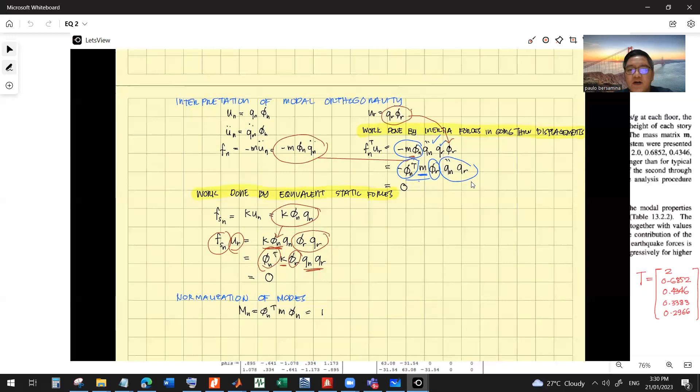I have a recorded video about this for modal orthogonality, that in order for this to be zero, phi n transpose m phi r should be zero, because omega r square minus omega n square is non-zero.

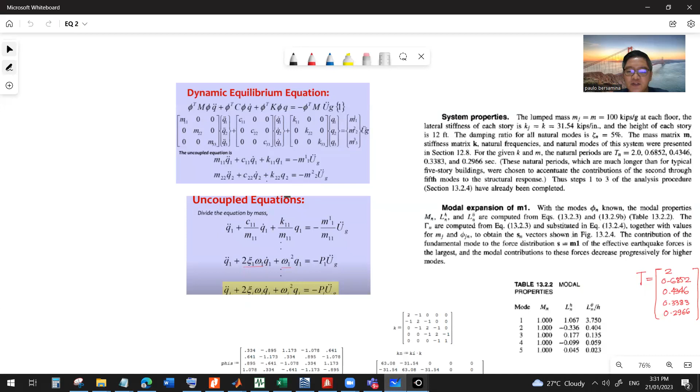For example, if we have modes, say for this 5-story, we have mode 1, mode 2, mode 3, and they are not equal to each other. So omega r square minus omega n square has a value, and since it has value, this is non-zero.

So for this equation to be valid, phi n transpose m phi r should be zero. And this is 1 if you have phi n transpose m phi n.

We call this the generalized mass, generalized mass matrix according to Chopra. This is also 1 if the modes are normalized. You will see that in Chopra.

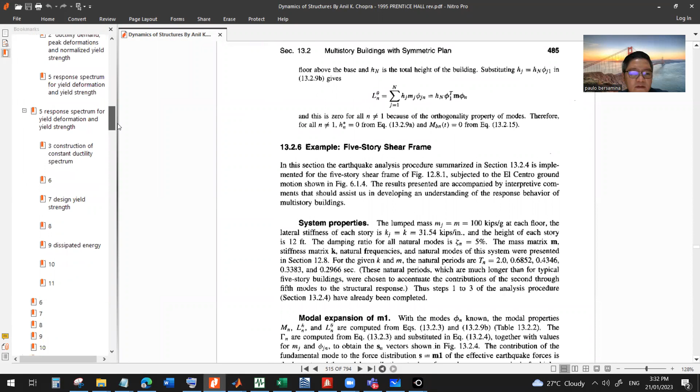Let's see where modal orthogonality is discussed. Chapter 10. There's a derivation there.

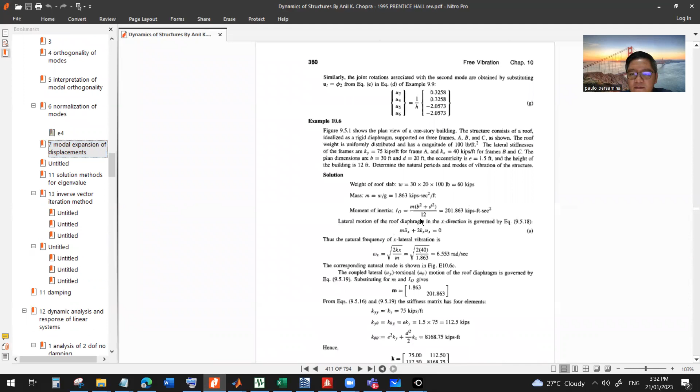So you will see this is M. Phi n transpose M phi n is the generalized mass matrix. For K it's the same, phi n transpose K phi n is the big K.

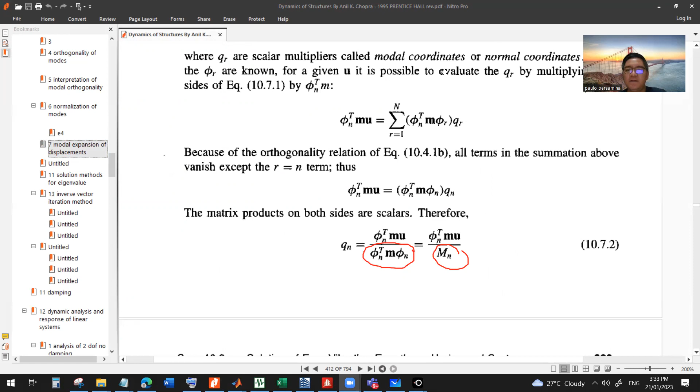Now let's proceed here. With that, this becomes a diagonal mass matrix, phi transpose M phi. But first, if we rewrite our equation of motion, that will be mu double dot...

So we have mu double dot plus cu dot plus ku equals the force as a function of time. And from this equation, the actual displacement is equal to a certain q multiplied by the eigenvectors. So we call that u equals phi q.

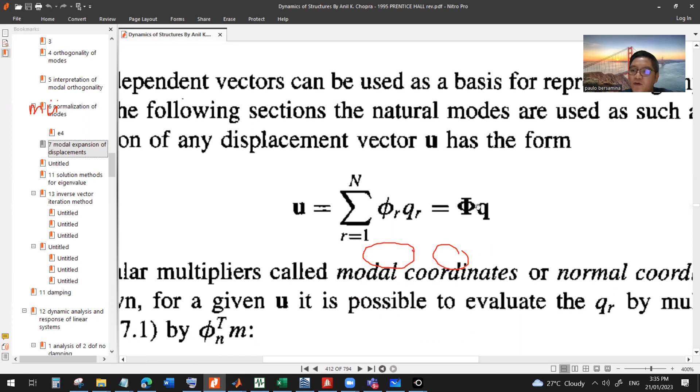So it turns out q is the multiplier to your mode shape. Remember, when we got the mode shape, for example this 5-story, we were able to find its mode shape. But that's not yet the actual displacement.

So in order to get the actual displacement, we need this q factor. So to get the actual displacement u, we substitute it in. So we have m: u double dot will be phi q double dot, plus c u dot will be phi q dot, plus k u as phi q.

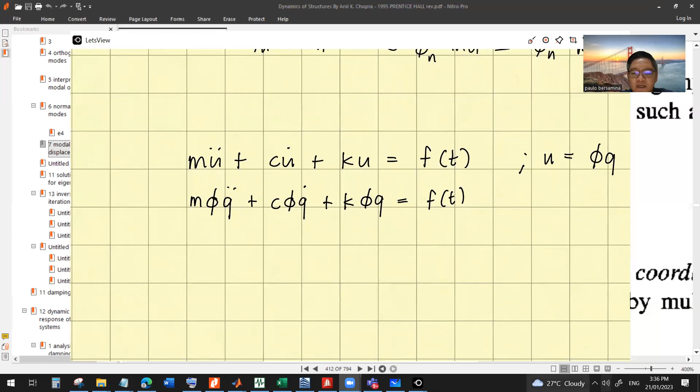And then it says let's multiply both sides with phi transpose. So when you do that, we're going to have phi transpose m phi q double dot plus phi transpose c phi q dot plus phi transpose k phi q.

Now, since we know this is m, this is the damping matrix, this is k, we can call this the force. Therefore, we now have this: m q double dot plus c q dot plus k q, using the big K now, equals the force as a function of time.

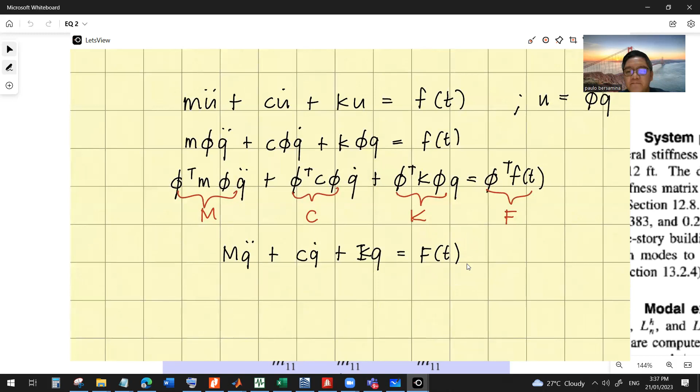Then what did they do next? This equation already shows us that we were able to uncouple the equation of motion.

If we interpret this, we have this: M becomes a diagonal matrix, so C11, C22, C33, same with K. So for example, what's shown here is 2 degrees of freedom, or 2-story.

You will see you have equation 1, equation 2, independent of each other: M11 Q1 double dot plus C11 Q1 dot plus K11 Q1 equals negative N11 U double dot. Of course, this is just another representation, phi transpose F, since this is ground motion, the force here.

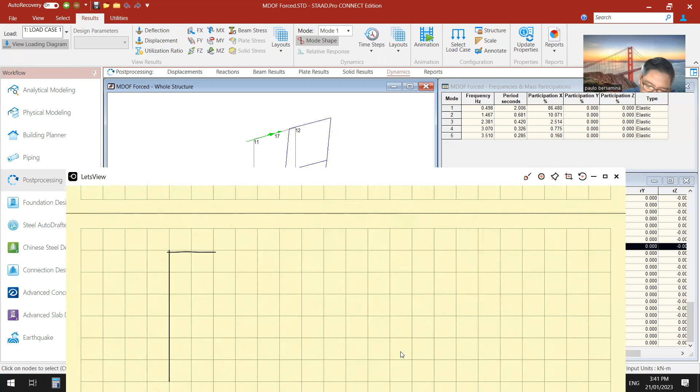Let me write this again. So let's say this is it. 1, 2, 3, 4, 5.

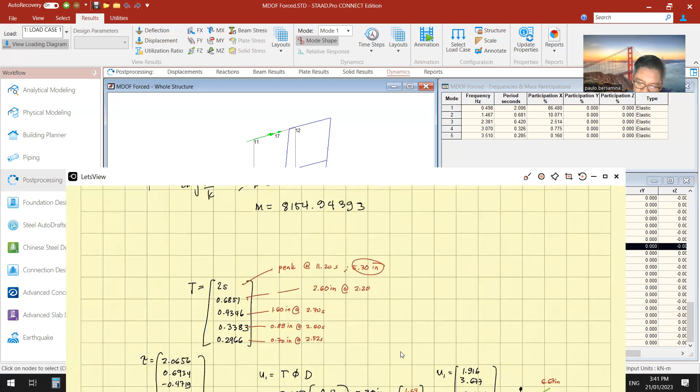Okay, let me write down the periods. We have these periods, I think we already solved this before. Let me just copy this. This one, copy... and paste. So these are the periods, and we already have the SMath for that.

Okay, now let's apply a force wherever you want. Okay, let's go here again. Let's say 30 sine omega bar t. So let's place a harmonic force at that location.

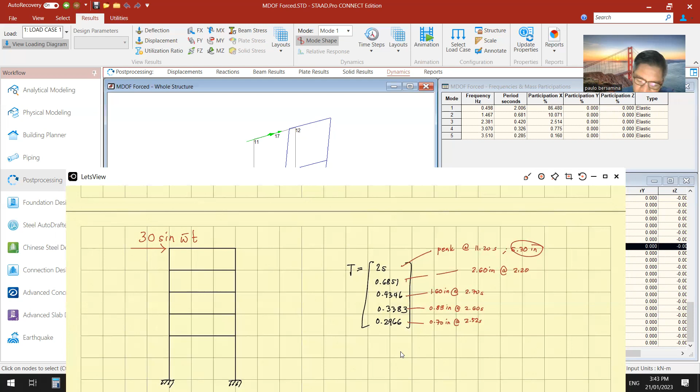So we're going to find the response of mode 1, mode 2, mode 3, mode 4, and mode 5.

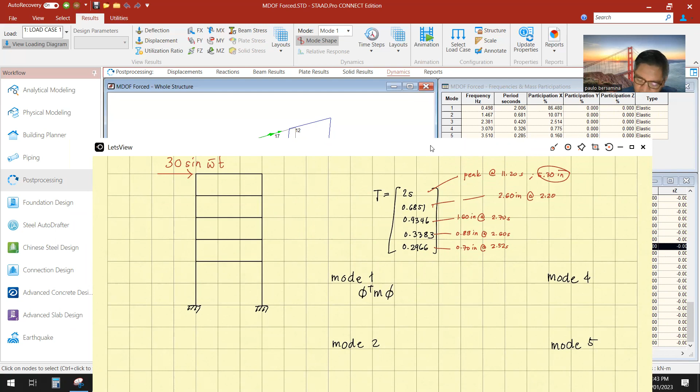So we'll take one by one: phi transpose M phi for mode 1. Same for K: phi transpose K phi for mode 1. And also the phi transpose F.

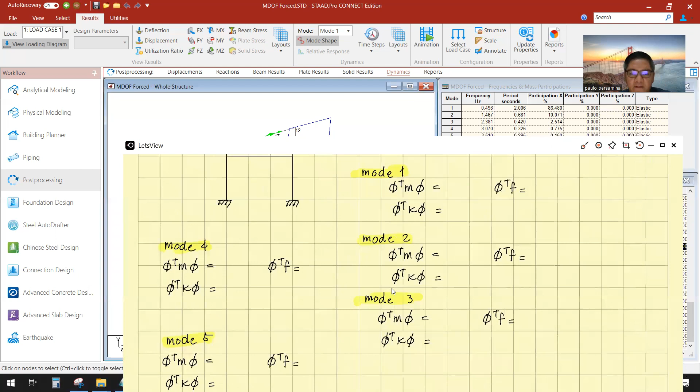Okay, that's mode 4, mode 5, and I'll highlight that. So we'll use our SMath that we used last time. Where is it? I think this one.

Although this one is in inches, since this is patterned after Chopra. Okay, let's continue. I have an SI version of this. This one. Yeah, this is in SI already.

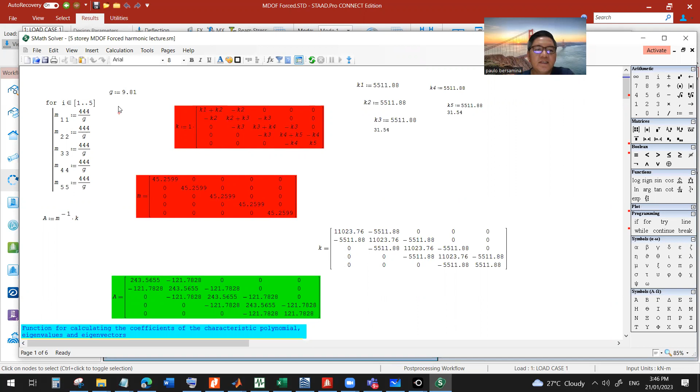So the 100 kips becomes 444 kilonewton, and this time our G is 9.81. Remember, this is our check, the periods, to make sure we're using the same data.

You have 2 seconds, okay, 0.68, 0.43, 0.33, and 0.2966. Okay.

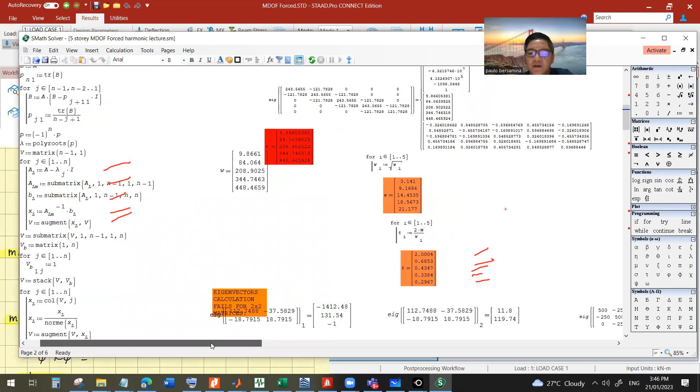So since the periods are consistent, we'll follow this eigenvector or mode shape. So I've placed it here. Wait, not that one. Yeah, this one.

So remember, this is our equation to solve the generalized mass for each mode: for mode 1, phi transpose M phi. And this is my corresponding SMath value for that. Let's zoom in.

So remember, in SMath, this is mode 1. This is phi transpose, this is the mass matrix, and this is the phi. And it turns out this is our mass for mode 1, and we do the same for each mode.

So this is for mode 2, mode 3, mode 4, mode 5, and so on. You'll observe the mass is the same, since the mass per floor is the same. So let's write that down.

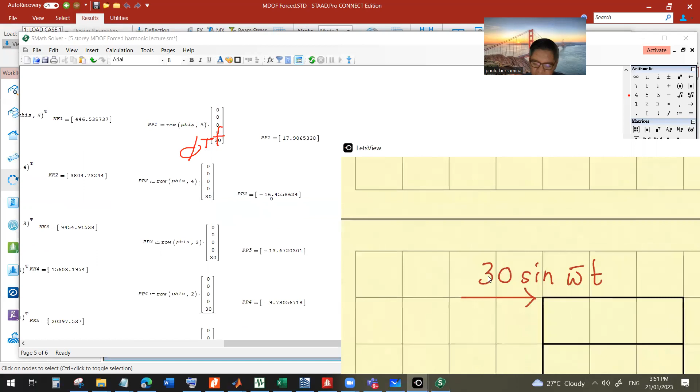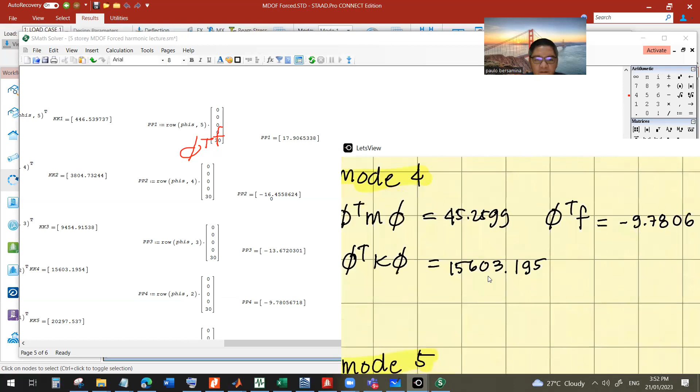So that's 17.90653. Mode 2, negative 16.456. Mode 3, negative 13.672. Mode 4, negative 9.7806. Mode 5, negative 5.09674.

So this is it. Quickly, let's try to absorb what's happening. Basically this generalized mass and stiffness idealizes each mode into an SDOF - the MDOF becomes an SDOF.

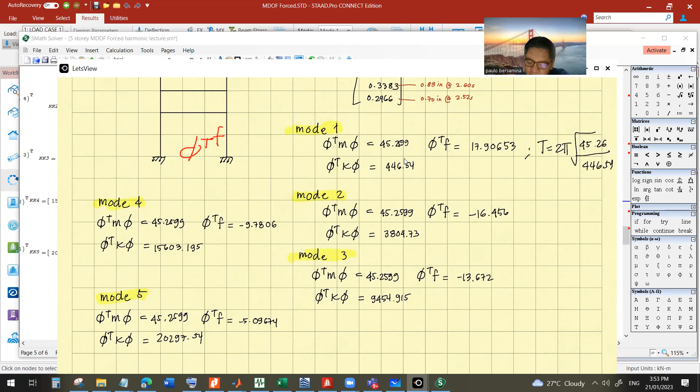So for example, let's substitute the period: 2 pi square root of m, 45.26, divided by k, 446.54. Look at that, for mode 1.

Okay, then when you substitute that, what do you get? You will basically get a period of 2 seconds, which corresponds to what we got in our eigenvalue analysis. Parang kinonvert niya yung mode 1 into a mass and stiffness to come up with this period. So yun yung ginagawa niya.

So once we have that, kukunin na ngayon natin yung mga response, yung time history response ng bawat mode. For example, so let's...

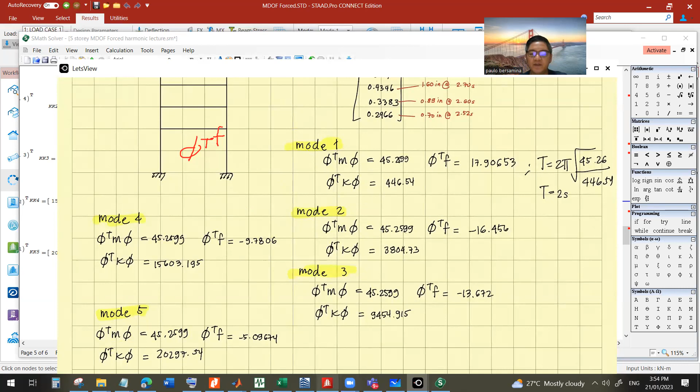Okay, punta ngayon tayo dito sa STAAD natin. Let's subject that to the force, 30 kilonewton, sine omega bar T. So what omega bar do we want?

For example, let me review first. Ano ba yung omega bar nito? Or sorry, yung omega, no? Frequency ng bawat mode. Yan, ito yung frequency ng bawat modes. I'll try to write that here to give us an idea. So omega is equal to, meaning the natural frequency.

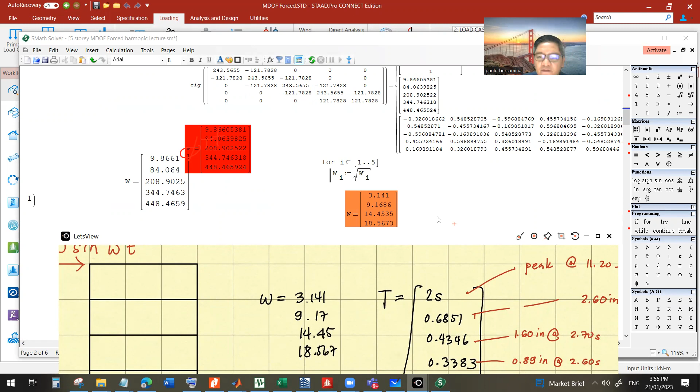So this is 3.141, 9.17, 14.45 — apat lang to — 18.567, and finally 21.177.

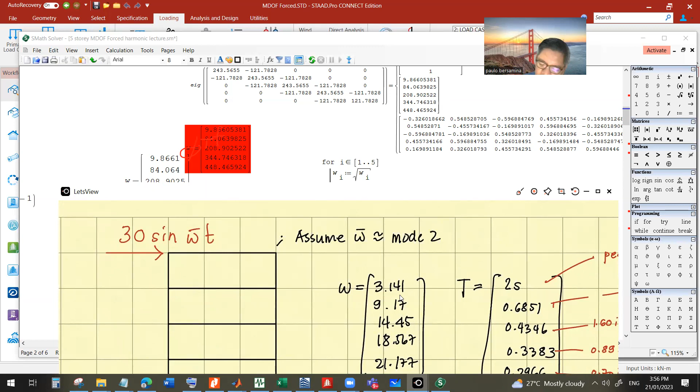So let's choose an omega bar of, let's choose an omega bar near, for example, near mode 2. What do you want? 9.17, okay. Assume omega bar 9 near mode 2, say 10, yan, 10 na lang. Say omega bar 10, okay. So anong cycles yan?

So 30 sine, what's that? If I convert that, 10 equals 2 pi, so that will be 10 divided by 2 pi, kasi one cycle is 2 pi. 1.5915. Yeah, 1.5915, okay?

One point — 30 kilonewton, say assume tayo ng 5 cycles lang para maiksi lang. Then modify, yes close, and undump tayo. Where do we — ito siya. Then lagay natin dito sa taas. Applied here. Okay, so save.

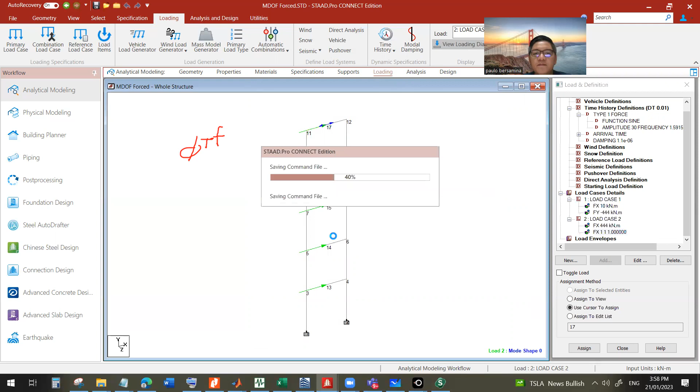Then analyze, run analysis. Post-processing, dynamics. So the same period. Dito tayo sa displacement.

Yan, so this is the displacement at the roof. So we have a maximum displacement of 28.4. So I'll...

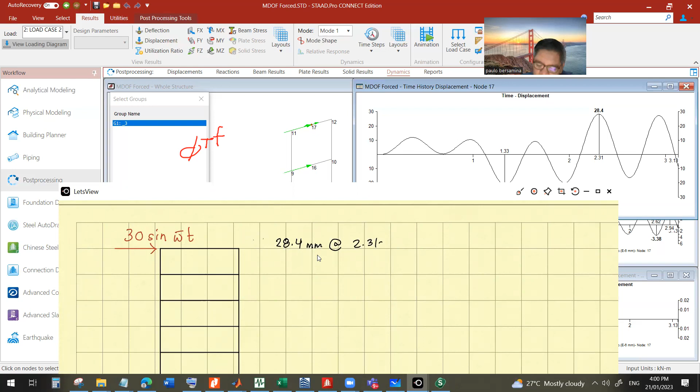So let's record that. 28.4 at 2.31 seconds. Now how about sa fourth floor? 15.3 at 2.33 seconds. And here, 18.6 at 2.6 seconds. 28.1 at 2.6 seconds din, and 20.1 millimeter at 2.62 seconds.

Okay, how about — okay, say — alam, this one.

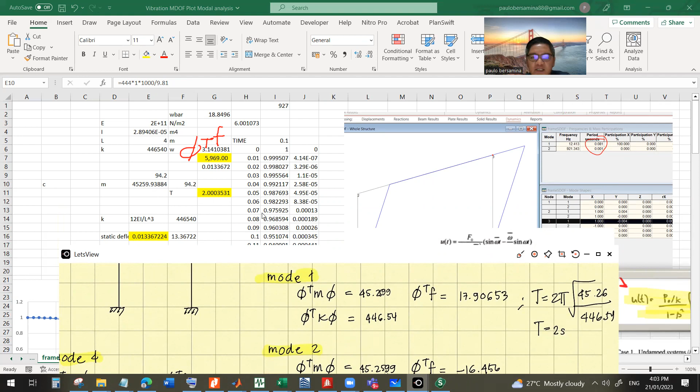Okay, now remember ito yung nasulat nating mga mass. Generalized mass for mode 1, 45.2599. So nilagay ko na siya dito, 45, dahil naka-Newton yung spreadsheet, 45,259, 0.93. Then the K is 446.54 — bali 540 kasi nga Newton per meter. How about the force? It should be 17,906.53. Palitan ko to — 17,906.53.

Then ito na yung time history response. Ah, by the way, ano yung omega ko pala? Ano yung nilagay kong omega? Is 1.5915, 1.59. Yan yung nilagay nating omega or cycle sa STAAD. And this is now the time history response of a 2-second SDOF. Okay, nagawa natin ito nakaraan, pero ngayon naka-specific sa 2 seconds, kasi nga yun yung mode 1 natin.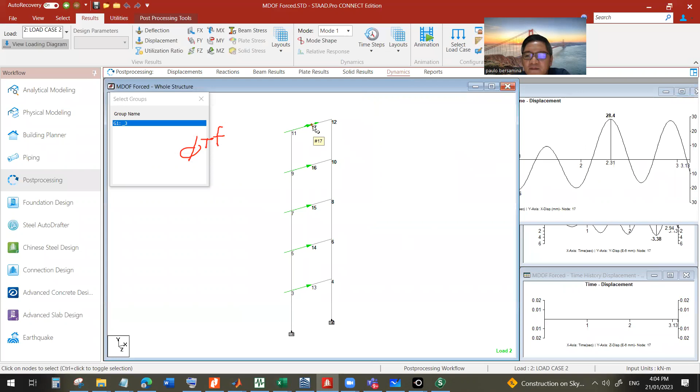Okay, so i-verify muna natin itong response ng roof, 28.4 at 2.31 seconds. Nasaan si 2.31? Laki pala, ang haba pala, wait lang. Teka, ano bang magandang — 2.31. Sige, yan, 28.4, 2.31.

Sige, dagdagan ko to ha. 2.31... 1.7 pa lang. Ayun, so here ang response ni 2 seconds sa 2.31 second ay 1, 2, 3... 15.47, 15.48 na lang, millimeters. So kay mode 1, sulat ko dito, 15.48 millimeters at 2.31. Okay, sinulat ko.

So under 2 seconds yan. Next, punta naman tayo sa mode 2, which is 0.68. Okay, 0.68, ito, 0.68. So double check natin yung mass. Yeah, the same, 45.259, ito, yan. 45.259, K, 3,804,730, yan, the same, ito yun.

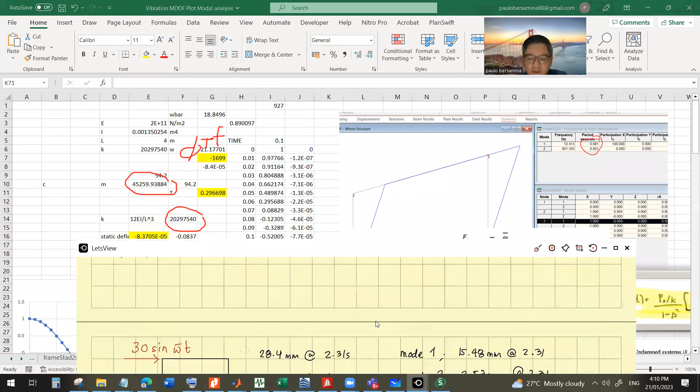At 2.31, and finally mode 5. Okay, let's check. Yeah, so mass is the same, 45,259, K, 20,297,540, and the force negative 5,096.74. Okay, yeah, 2.31. Okay.

Yeah, I'm getting negative 0.53. So wala nang effect yung halos, negative 0.53, 2.31. That's it, no? Now when we add up all that, what do we get? So ito yung summary at 2.31.

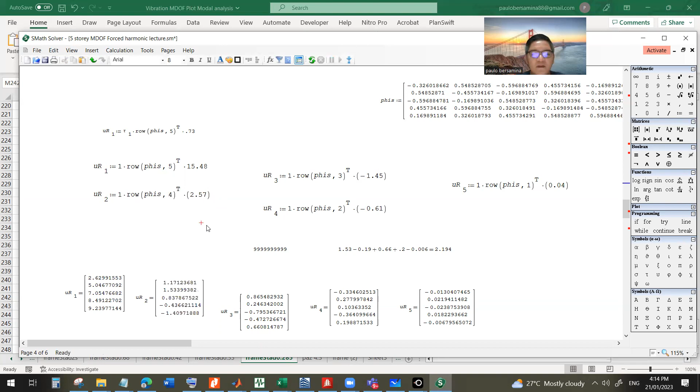Okay, ito. So I'll try now to input that here. So input ko si 15.48. And then 2.57, like this one. Negative 3.36. 9.72.

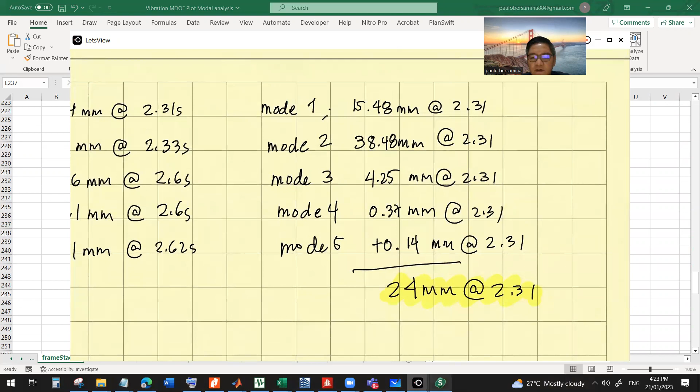So, 15.48. So, strip natin dito. And this one is 38.48. And then, ito, 4.25. 0.37. Okay. 0.14.

Maybe ito may discrepancy lang to na ano, 15 and 38. Paras mo silang positive. Okay, they're both positive.

Ayan. Updated ba yun? Ano, yung aking vector. Copy ko to. Copy this, then paste here.

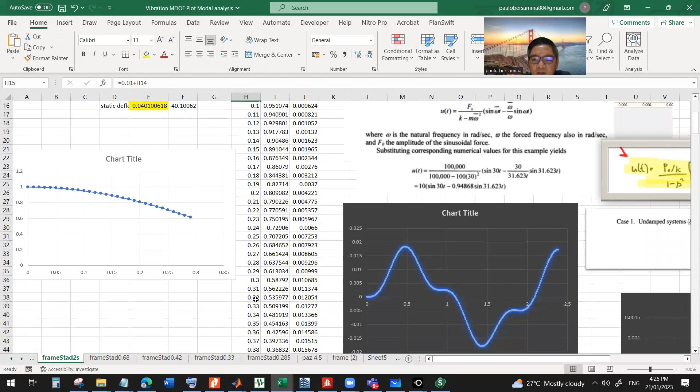Maybe because this is more on sa, what do you call this, masyadong close yung aking spacing. Point lang no? 0.01, no? 0.01. Oh ba? Yeah, 0.01. Let me check.

Okay, double check natin. Negative si mode 2, negative si mode 3, negative si mode 4, negative mode 5. Okay, correct.

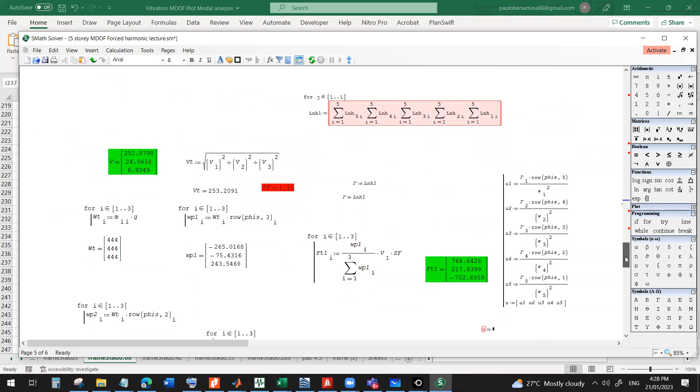So the sign, no? And return to mode 2. Ayan, it should be negative, no? Negative 38.48. Okay. So I'll make this negative 38.48. Yeah, okay.

So pansin nyo na, when I change the value into negative 38.48, naging positive na siya. Naging additive na sila ni mode 1 and mode 2. Okay, nakita ko the values are already close to each other, no? Kasi sa signs, there's a discrepancy on the signs. Okay, so basically this is now the displacement at 2.31.

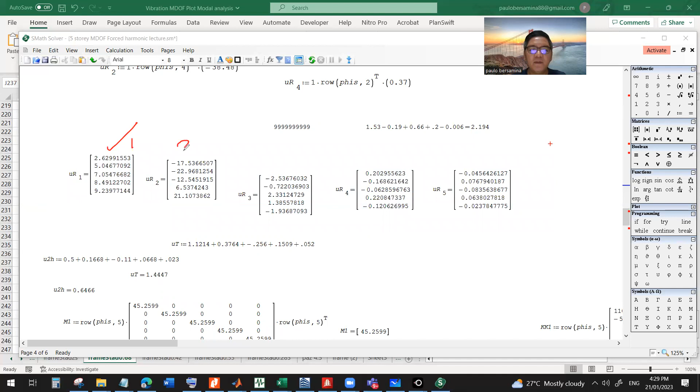That's it. Yeah, this vector, no? Displacement vector na yan from each mode. Contribution by mode 1, by mode 2, by mode 3, by mode 4, by mode 5, at 2.31 seconds. Kasi yun yung kinapture natin, that's what we captured earlier. Okay, so for example, these are the values at the roof.

Huh? Yeah, so when you add up 9.24 plus 21.11 minus 1.94 minus 0.12 minus 0.023, so now I'm getting 28.27, which is pretty close kay STAAD, no? STAAD gets 28.4. Ito siya, at 2.31 seconds. Okay?

Okay, so let's recall what we did. Basically, again, we got the maximum, hindi maximum response, the time history response of each SDOF, treated each mode shape, or modal period, as an SDOF, at a certain time, 2.31 in this case. Then nilagay natin sila dito, these are the responses of that modal period at 2.31. So basically, this is the implementation of U equals phi Q. We were able to get Q, the responses from each mode. Then this phi transpose, yan na yung mode shape, multiplied to the response of each mode. Then with that, you will be able to get the displacement from each mode naman. Okay?

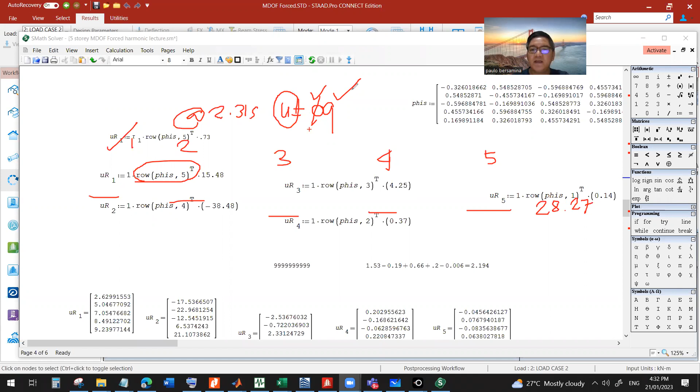So that's how we implemented the modal analysis. Again, it doesn't mean that's the maximum response. We just captured the time history response at 2.31 seconds.

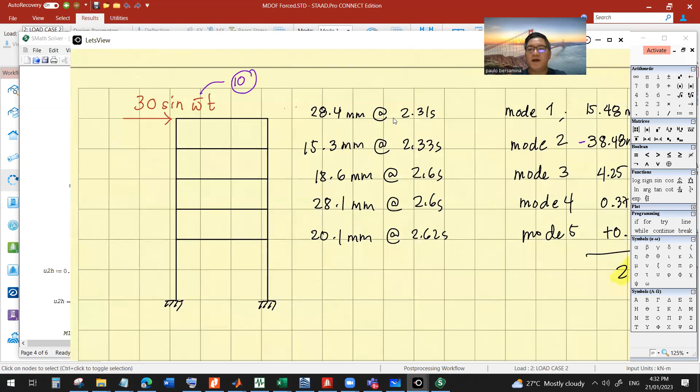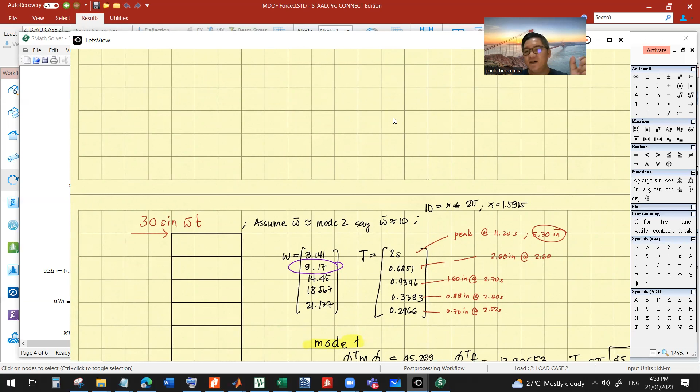And this is the summary, which I wrote down earlier: 28.4 at 2.31 seconds. Remember, our omega here is 10, omega bar. Let's compare - we really intended that to be as close as possible to mode 2, which is 9.17. Meaning we applied a harmonic force to the MDOF, the 5-story structure, exciting mode 2, which means the response of mode 2 will be amplified, or it will be the one excited.

And let's see if that happens. If you look at the summary here, see which one has the maximum response at that time period. Mode 2 - we were able to see that the maximum response is at mode 2, at 38.48 millimeters at 2.31 seconds.

So it means if we change the omega bar such that it's close to mode 1, that mode will have the maximum response, because it's the one excited at that time period, because of this omega bar.

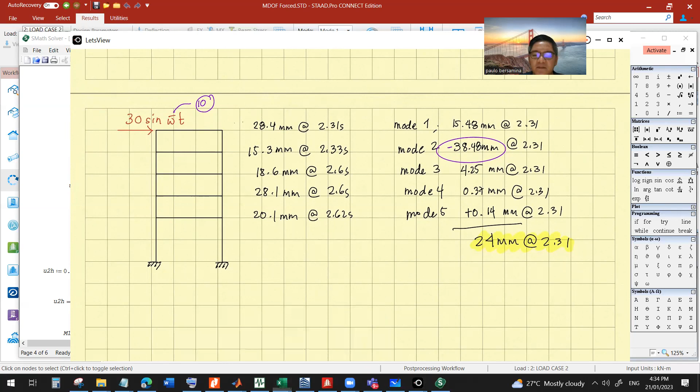Now in getting the maximum response, this is similar to what we did for time history under ground motion - this is time history under harmonic excitation. Now to get the maximum response, similar to response spectra analysis, same procedure - you just have to get the maximum response in each mode. Just find the maximum response.

Let's check. If we check the time history - but for me, the shortcut will be to change the cycle. Let's try to change the cycle. Instead of just 5, let's make it 30. Then during the time history, let's check if we achieve the maximum response.

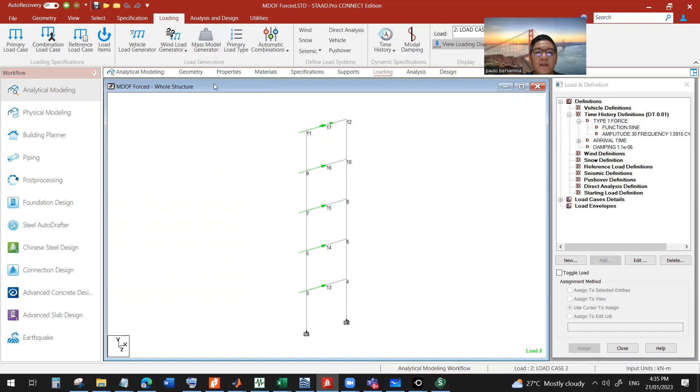Analysis. Run analysis. Post-processing. Okay, then results, displacement. And so...

For the roof, we got a maximum response of 35.9 at 11.5 seconds. So it takes a while - it needs more than 10 seconds to get the maximum response. Anyway let's try, 11.5 for maximum response, 35.9. I'll write that down: max response 35.9 millimeters

at 11.5 seconds. How about the second floor? Take note, this harmonic force is in resonance or almost in resonance with mode 2. And we got 17.6 at 12.4 seconds.

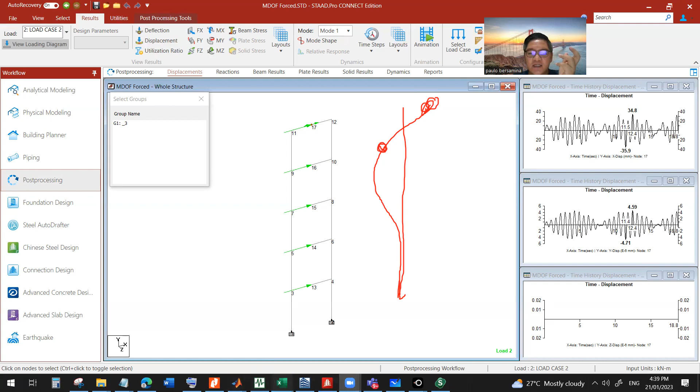seconds. So what we do now is check the time history response of each mode. Let's find the maximum response. So around 11 seconds - because this is the summary, if I show you, this is the summary of the maximum responses. Assuming we've covered the maximum response, you will observe the maximum response is in the vicinity of 10 to 15 seconds,

if you consider this 31.9 which happens very early at 3.6. So let's stick around 10 to 15 seconds. Let's check - meaning we'll extend the time history here, for mode 1. Let's check if that response is indeed achieved. So this will be a bit long.

Yeah, so it's there. 13.42, this should be enough now. I'll change the cover here.

So that will be J24... up to, what's the address? 1348. So I'll change this, I'll change it to 1348. This one also is 1348.

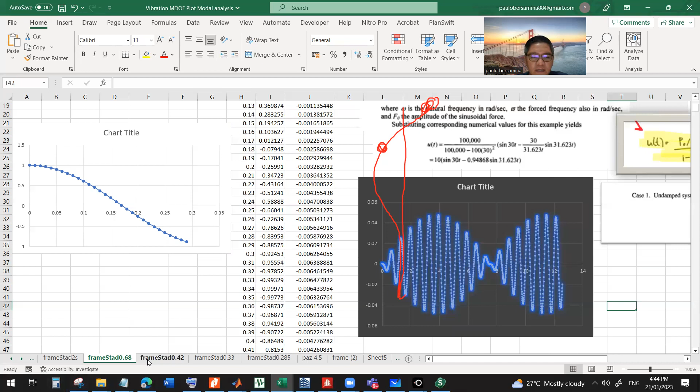Okay, 18.3. Now about mode 3. Let's cover up to 10 seconds also. Let's check if the address is 1231. Mode 3, this is now 1231.

And you will observe a cyclic pattern still. By inspection, the maximum response is maybe here - this is it. 1, 2, 3, 4 - 4.64. It's just around there, the max/min is around 4 anyway. 4.64 at 0.77 seconds. So that is mode 3.

And mode 4, about mode 4... 1158, okay I'll change this to 1158. Yeah, another cyclic pattern. And obviously, just a bit more than 1 mm - 1.4, yeah, 1.4. At time 3.3 seconds.

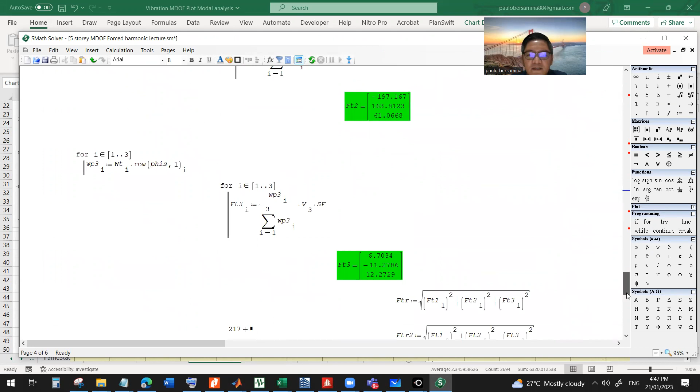47.14 millimeters. Okay, maybe let's guess mode 5 later. So if we talk about the maximum response, maybe - where do we insert this? What's that, maximum response? I'll just copy this. Control C. Nothing else to change really.

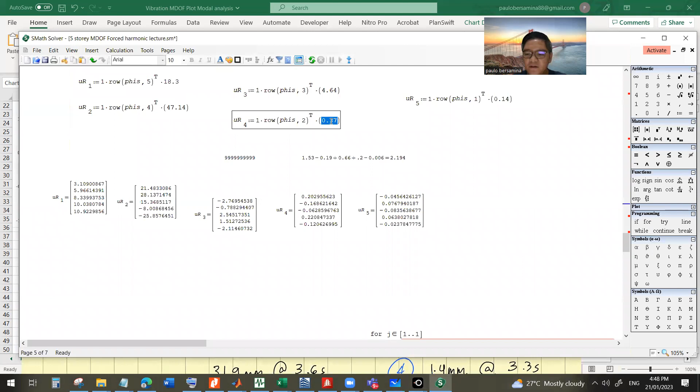Then move this, paste here. For maximum response, analogous to the response spectra analysis we did. I'll put 18.3 for mode 1, then 47.14, then 4.64, and last 1.4. I'll leave mode 5 for later - put 0.14 for now, that's fine. Okay, that's it.

So this time, what I input to the Q is the maximum response. Then these are not realistic displacements, because they come from the maximum response. We'll just do the SRSS. Square root of - where do we square root here? SRSS response. SRSS underscore response is equal to the square root of 10.92 squared, plus 25.86 squared, plus 2.11 squared, plus 0.456 squared, and then plus 0.024 squared. So this is the SRSS response.

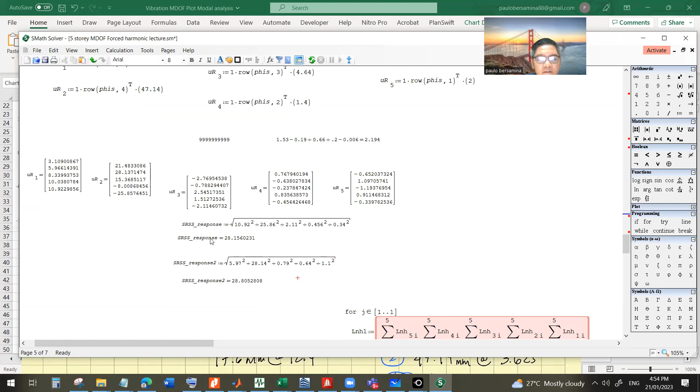Maybe this should be... no, that's correct. Okay.

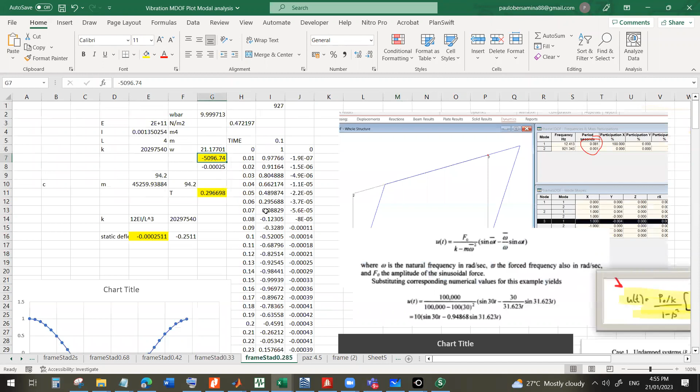Let me continue with mode 5 briefly to complete this. Okay, 1312. Like this, 1312. This is actually large too - 0.4, just 0.4. Point 4. This is 1 point something.

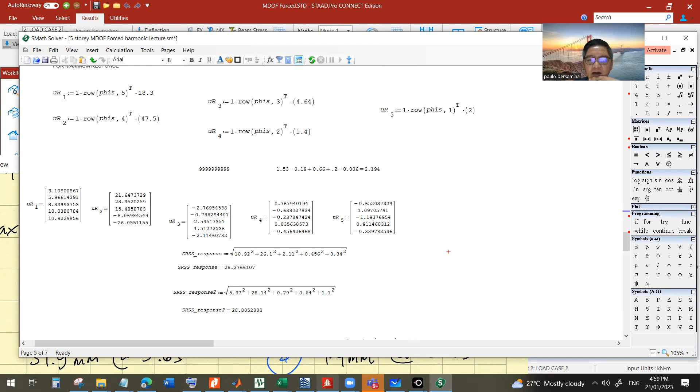Then for second floor, max response, or fourth floor, suddenly goes down, 17.6 only. So you will observe by the summary that it's still roof that has the maximum displacement, because that's also how mode 2 behaves.

But although roof has the maximum displacement, you will observe the contribution of mode 2 is really large. Still large, the contribution of mode 2, because if we use this for the fourth floor...

Let's copy this again for the fourth floor. Let's get its response: 10.04, 10.04, 8.1, 1.5, 0.5, 0.84.

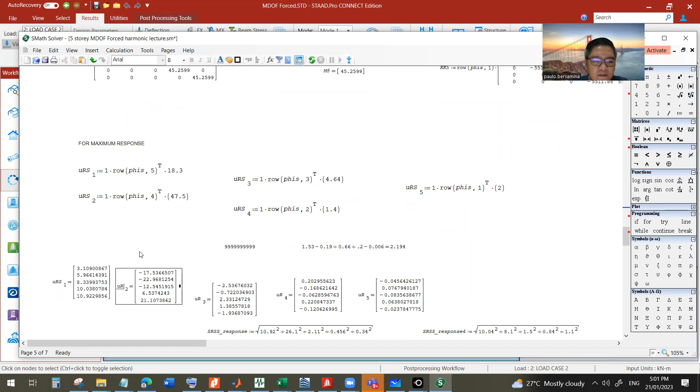Anyway, nothing changed, 26.1, 2.11, at least consistent. For the fourth floor: 10.04, 8.1, 1.5, 0.84, 0.

Wait, this is only 0.4. 0.18, 0.18. Let me copy this, paste here, equals. I'm getting just 13 mm.

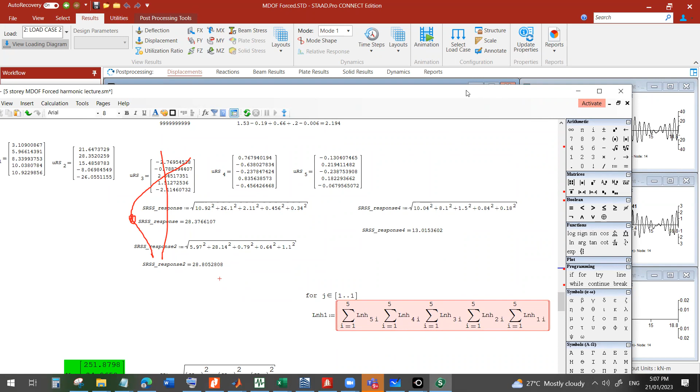Okay, and take note, the time when the maximum response occurred, between 3.6 seconds and 4.58, which is the same time the maximum response occurred for mode 2, 3.62 seconds.

And that's mode 2. So you can see the contribution of mode 2 is really dominant, because again, the applied force is almost in resonance with the natural frequency of mode 2 of our structure.

So that's your modal analysis. We were able to independently analyze each mode and then combine their responses to get the total response of our structure.

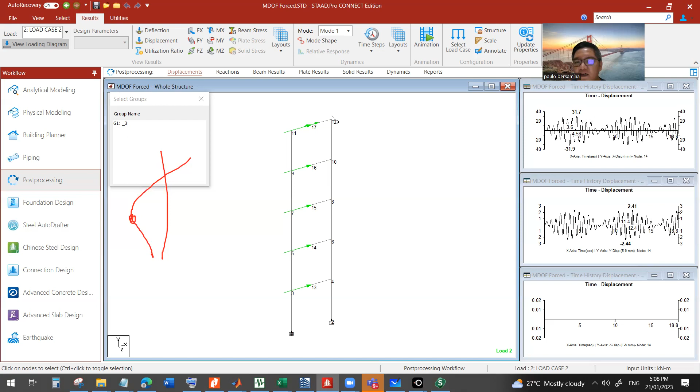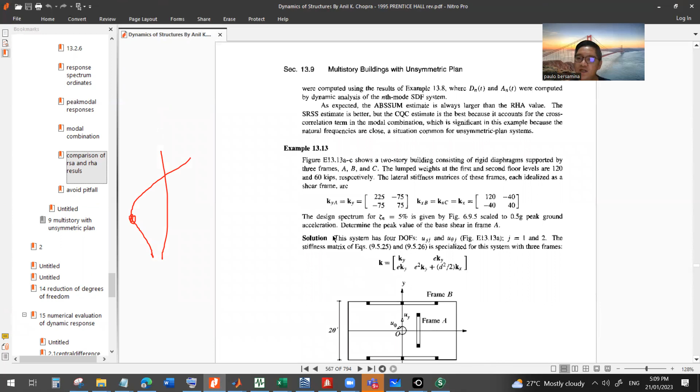Okay, you can supplement with CQC on your own, because there's a tendency for CQC to get close to our response here. As per Chopra, I think it's mentioned that there's a tendency to match - CQC will be more useful when the modes are close to each other. When the modes are close, there's a tendency that CQC is more preferred than SRSS.

Anyway, that's the technique to combine the responses. But I've shown you the time history response also - that's the more accurate one, of course, because that's the actual time history response.

But the benefit of SRSS and CQC is you don't need to compute the time history. If you have the time history of each SDOF, it's much easier to compute the maximum response, but it's a statistical combination that's being done - it's either SRSS or CQC.

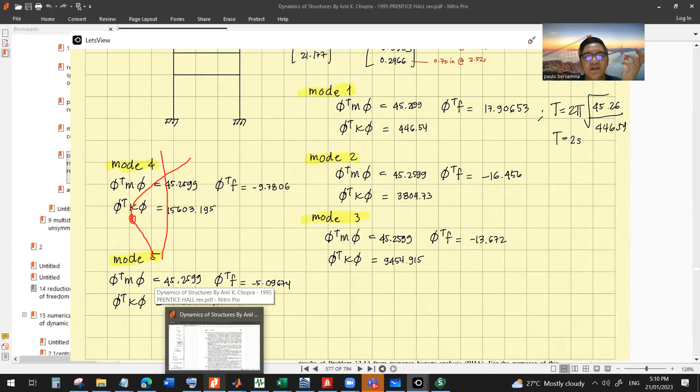Where is Mario Paz? Ito na lang.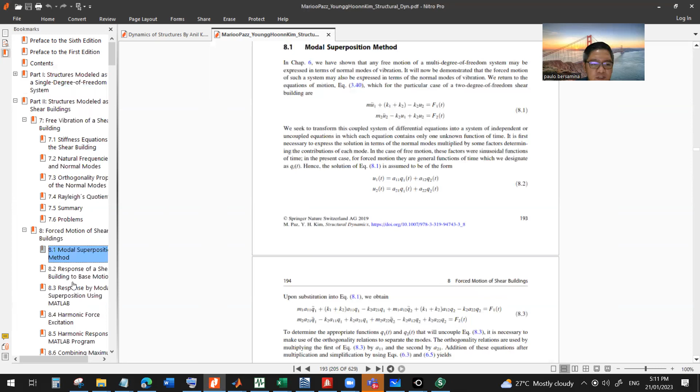Kasi the modal participation factor is used, no, dun sa under earthquake response. Where's that? So force motion, base motion, ito. So dito siya lumabas. Participation factor. But you will see yung derivation niya is still kagaya ng ginawa natin. So meaning this participation factor is this one. Actually this is basically phi transpose M divided by phi transpose M phi. Yan lang yon. And in our notation earlier, this one is the generalized mass. Okay, so ito din yon.

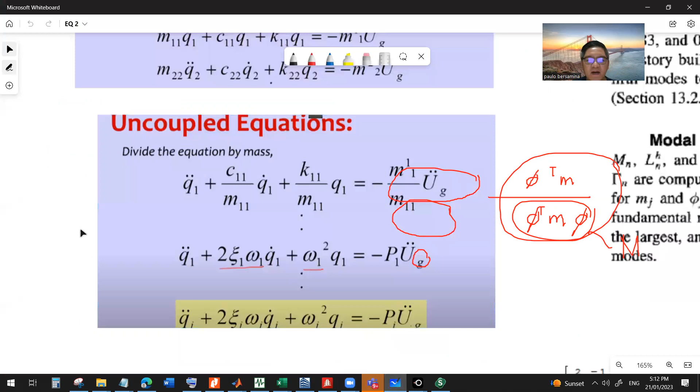Okay, and if you simplify that, remember in this presentation naman, ito kay SK Ghosh, this one. Nire-relate ko lang doon sa past lecture para ma-connect nyo. Nakita nyo to, itong formula na yan. You will observe this formula of L is actually this. Phi transpose M. Kasi ito, W over G is mass, no? So basically, yan yung phi m. Phi transpose because vector to, no? What do you call this? Transpose of the mode 1 or mode eigenvector to the scalar m.

No? Yan, kaya phi transpose m. Ito lang yun. Then this m phi square is this one. Phi transpose m phi. Right? Ito is basically phi transpose m phi. Okay, hindi yan obvious kasi kay Chopra. Hindi ganyan yung presentation ni Chopra. At ganon, kay SK Ghosh, ganito ang presentation niya. Kay Mario Paz is this one. And so, but yun nga, I'd like to remind you na they are the same, no? Yun lang din yan. Okay? Mas maganda kasi na may participation factors, nakita mo yung contribution nga of each mode to the earthquake response.

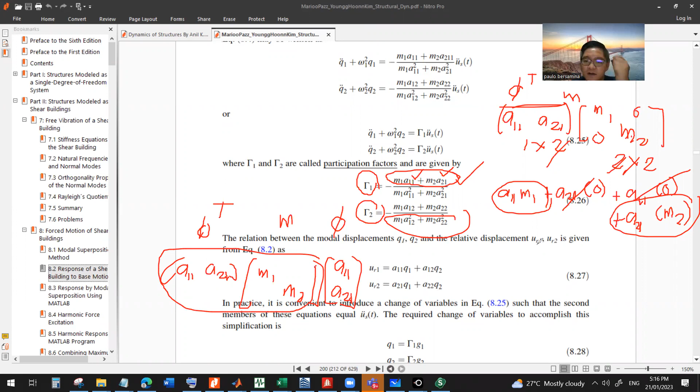So if we do this first, we got A11, M1. So diba this is 1 by 2, 2 by 2. You will get 1 by 2: A11 M1 and then this is 2 by 1, no? A11 M1 and then A21 M2, multiplied by A11, A21. So ito na yung 1 by 2 natin, and then this is your 2 by 1. Then you will get a 1 by 1 as a result. So that's it. So A11 M1, A11 plus this one A21 M2, then this one A21. And this is the same, so kaya naka-square siya.

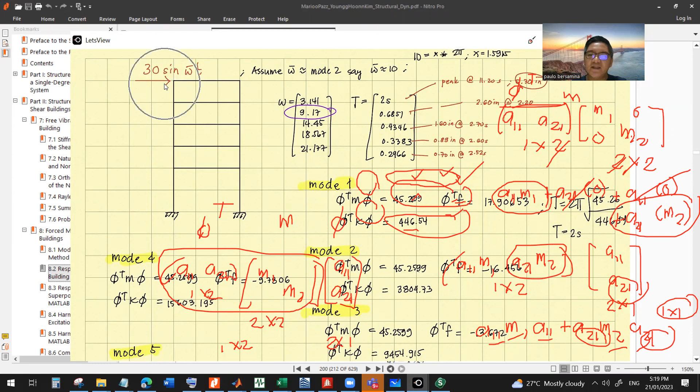So, this parang ano siya, no? For me, to reconcile the concept: applicable si participation factor because the variation of the distribution of the force, it's because it's an inertia force. The ground motion is an inertia force. So ibig sabihin, na-excite yung mass. Kaya kailangan mong makuha yung participation factor in relation to the masses. Unlike what we did here, hindi yan ground motion, right? So kaya straightforward modal analysis ginawa natin, we did not get the participation factor. Kasi nga the response is dependent on the force. Unlike the ground motion, ang na-excite sa ground motion is the masses. Kaya you can achieve, kumbaga, that's why it's wise to get the participation factor relative to the masses, no? And of course to the eigenvector.